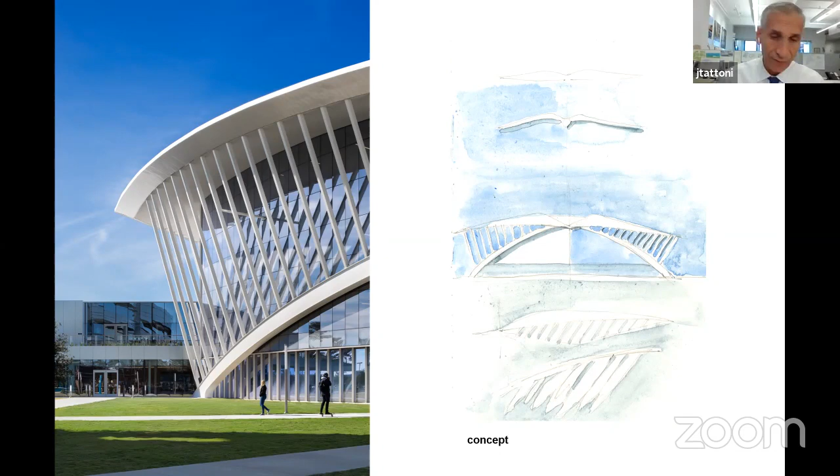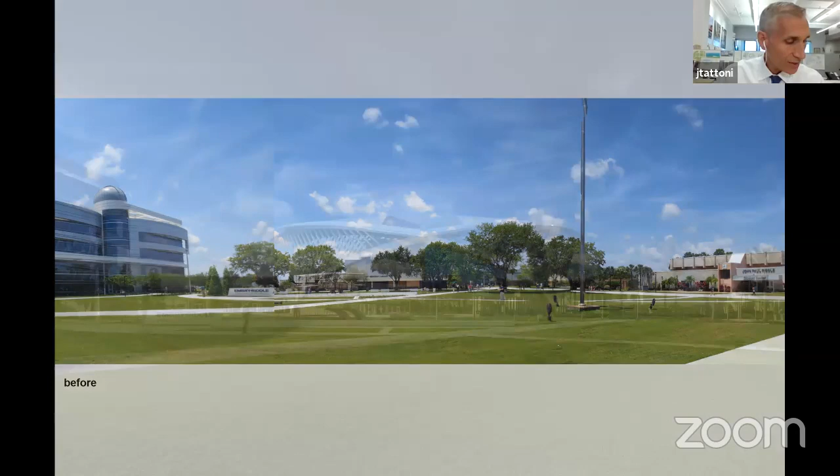This is a view of the site as one enters campus before the student union was built. We imagined that on this site, the overall resulting appearance of whatever we put here should somehow begin to belie gravity, to float and lift above the horizon. We realized the way to achieve that concept was through structural steel.

To give some further context to the project, the campus sits at the edge of the Daytona Beach International Airport. From this part of the site, one could see rocket launches from Cape Canaveral to the south. So it was an important site for the student union building.

One of the characteristics of campus life that we learned from students over and over again as we talked to them is how much they enjoyed gazing up at the sky to see the sky and the stars, walking around campus day and night. This gave them connection back to the discipline that they were studying.

So we decided to place in this project a 250-foot long glass roof down the middle of the building that would allow us to bring controlled daylight into the center of the student union and give students inside visual access to the sky that they love so much while socializing or studying.

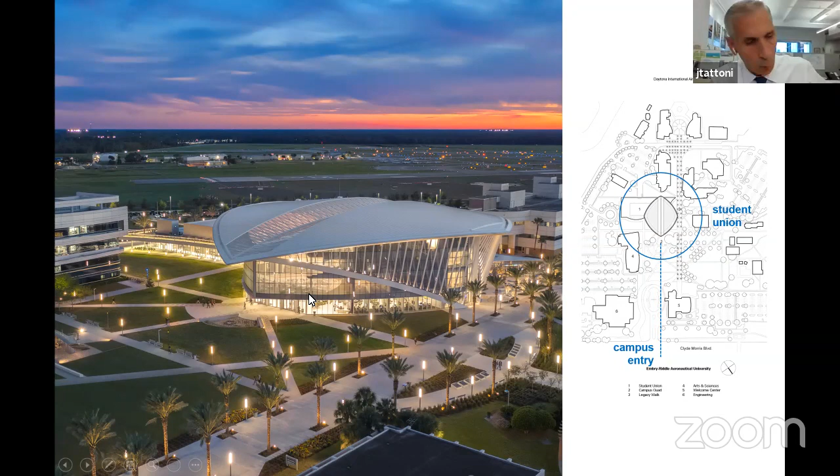It was at this point in the process that structural engineering, fabrication and erection, and conceptual ideas started to become real. How do we begin to make all this something real?

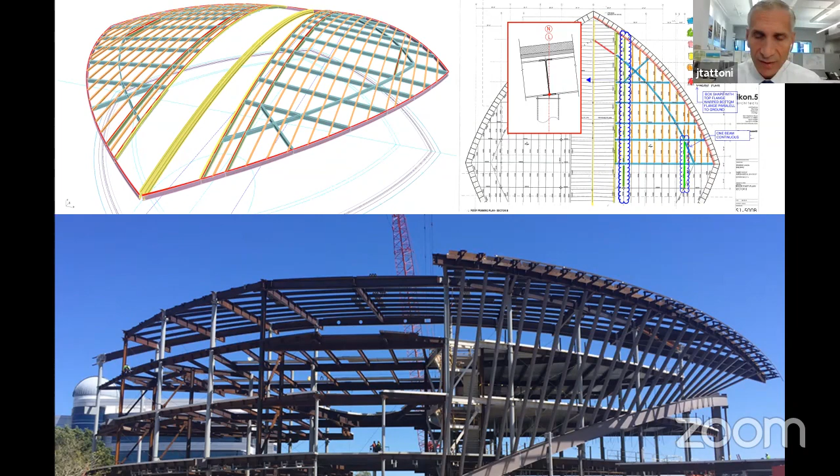The design team worked in multiple formats: AutoCAD, Rhino, Revit, Tekla, even hand-drawn sketches, to simultaneously refine and develop the concept of the student union.

Oftentimes, these ideas, like this one for the 250-foot arching spine beam that supported that glass roof, were initially conceived and developed between team members as hand drawings, just outlining quickly the design intent.

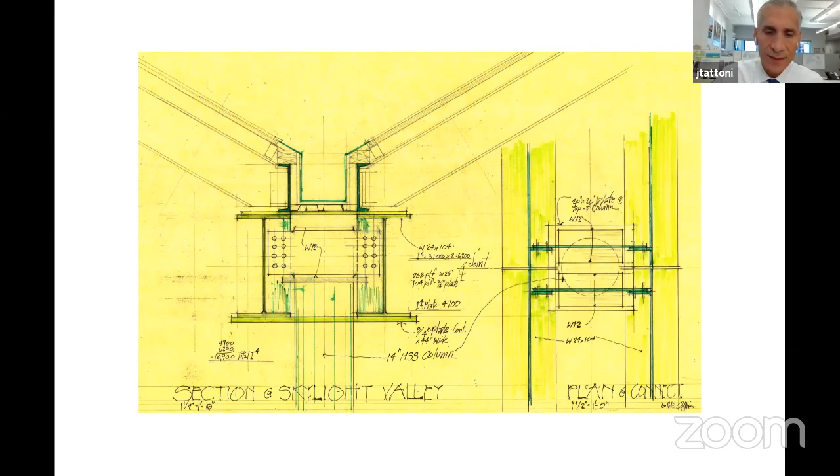Those sketches were then developed three-dimensionally during design, evaluating how all the component pieces would be put together in what ultimately ended up being a very complex structure, in this case the roof structure, and how they would seamlessly appear to be integrated, promoting the idea and delicacy of flight, the gracefulness of flight.

This was really a process of back and forth. While we imagined what we would like it to appear like, working with the structural engineer and thinking about the reality of the pieces often changed some of those expressions.

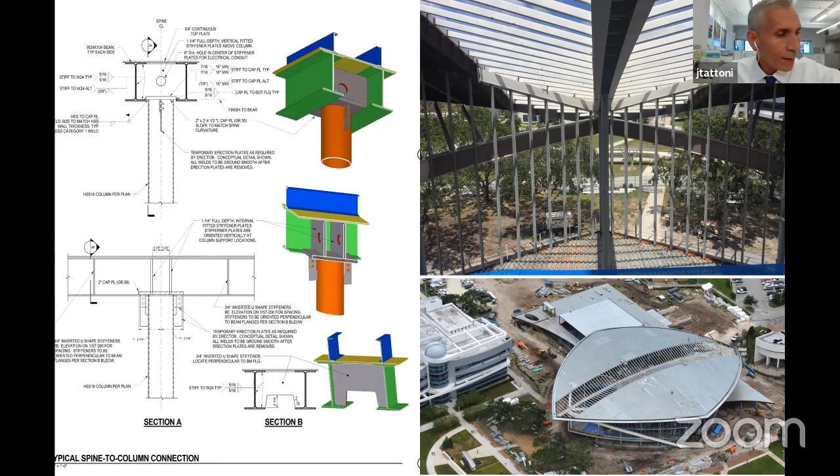So this meant no exposed plates, no exposed hangers, no exposed bolts. Every piece of exposed structural steel needed to tell the story of lightness and flight.

This is a view of inside the great lounge of the Student Union, looking out onto the campus green. It's a 4-story space that literally wraps and embraces you when you enter into the building. You could see the beginning of that glass roof with the arching spine beam down the middle.

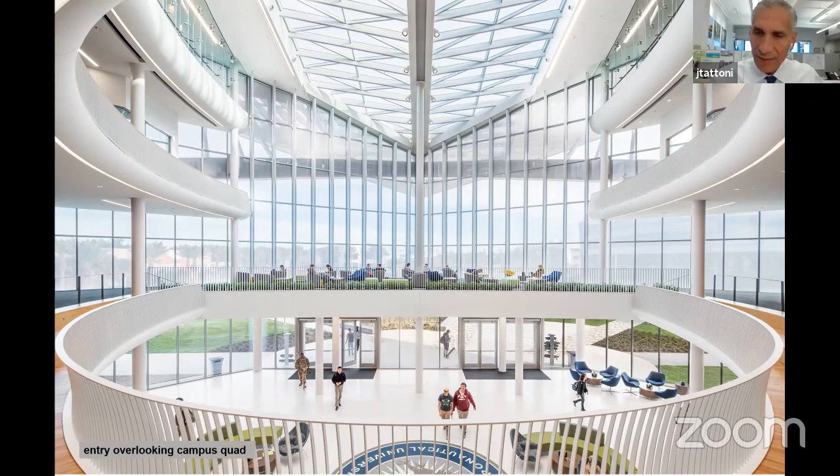It actually initiates outside above the entry plaza, continues into the great lounge, and then into the center of the building, where it allows the sky to be the ceiling of the university library on the 4th floor.

Structural steel tubes between that spine beam and the adjacent roof support that glass ceiling, or that glass roof.

Now, the exaggerated roof overhang gives the building its kind of lifting quality. It also provides deep shade for the building from the intense Floridian sun. The remainder of the building envelope, besides the roof, is actually glass.

So to stabilize that overhanging roof from wind uplift and hurricane force winds, we wrapped the exterior of the building with a sloping structural arch on the outside, and connected from that arch structural trusses that went up to restrain that overhang.

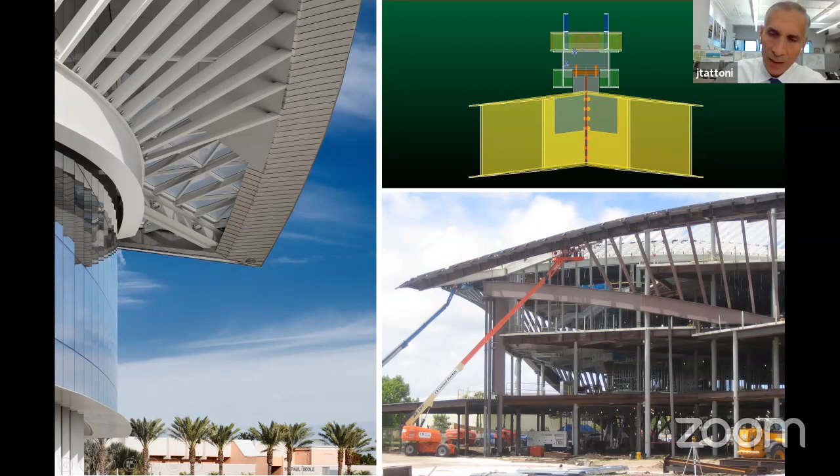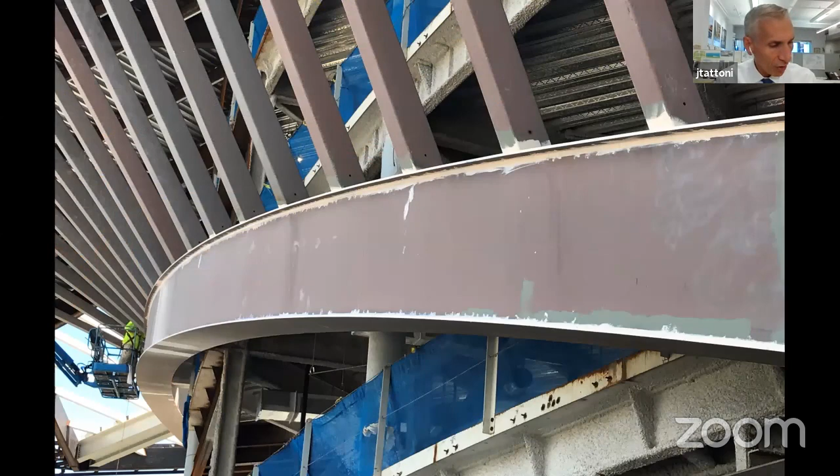Those curving shaping arches were fabricated in sections in Pennsylvania and then shipped to Florida for assembly on site. The assembly of that arch and the strut creates a fanning wing-like expression with structural steel.

So the result of all that coming together was we were able to restrain the roof, we were able to provide shade, and we were able to ultimately convey the mission of the university.

The result, as seen in this photograph, is really a very dramatic skeletal expression of movement created out of structural steel that allows and reveals all of the student activity that's going on inside the student union.

This is a view seen from a major pedestrian pathway on campus, coming across from the residential precinct to the student union in the center of campus.

Now, the student union happens to be bilaterally symmetrical, except for a 2-story, 900-person event center, which is on the east side of the building.

Now, that elaborate hovering roof that looks like it's magically hovering there really is not hovering there. It's supported by a forest of very serious columns that are taking all of the forces from above and from each of the floors and translating it down to the foundations.

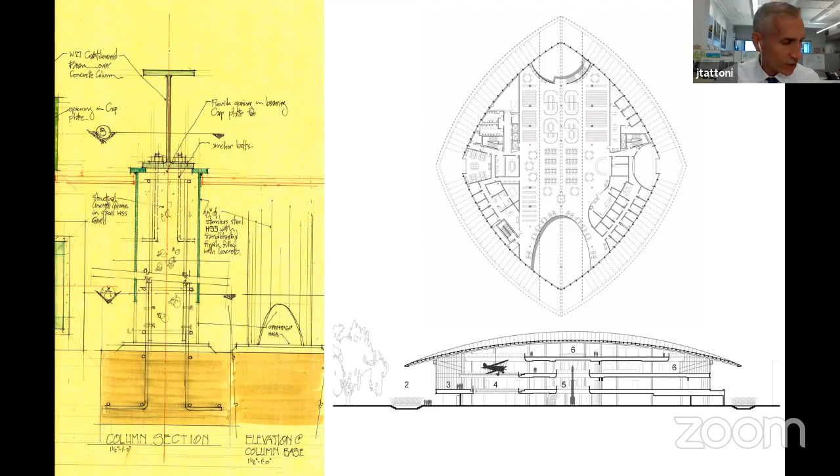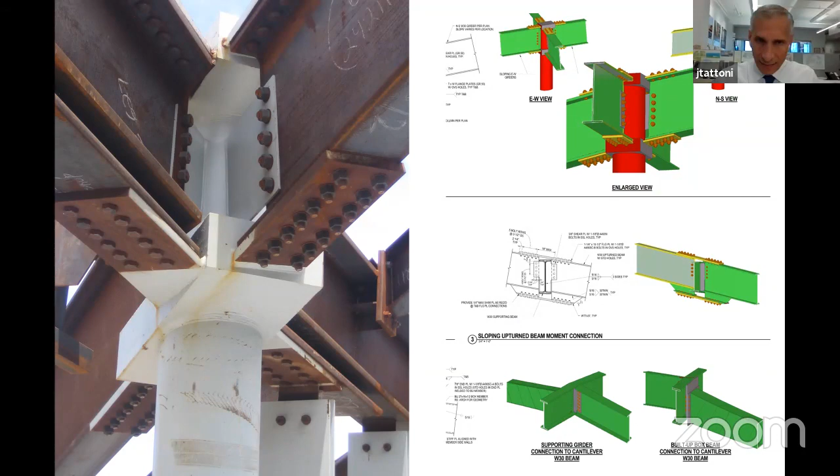All the warping, arching, sloping beams and plates that make those graceful forms on the outside of the building are concentrated into single points at each of the columns and posts. Yet those robust steel pipes needed to also appear very delicate and to disappear over the floating slabs of each floor, in order to convey that idea of lightness and flight.

This is a view of inside the student union, the great lounge space. You see in the foreground the horseshoe-shaped amphitheater seating that occurs on two of the floors above the first floor. So as students come into the student union, they're able to see their fellow students coming in and out, and they're able to be seen.

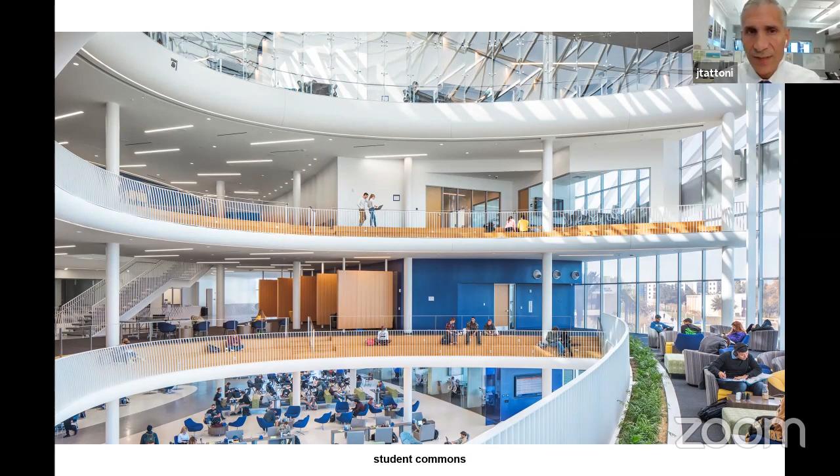This is an important factor in designing student unions. On each side of this great lounge space, there are a series of rooms that support it: group study spaces, career services, computer labs and classrooms, an e-gaming center, offices, student government offices, clubs and organization offices. Like the exterior, the interior forms and shapes convey an idea of aerodynamic movement also, while at the same time framing views of the beautiful campus beyond and providing a variety of seating types for both group work and collaboration, as well as individual scholarship.

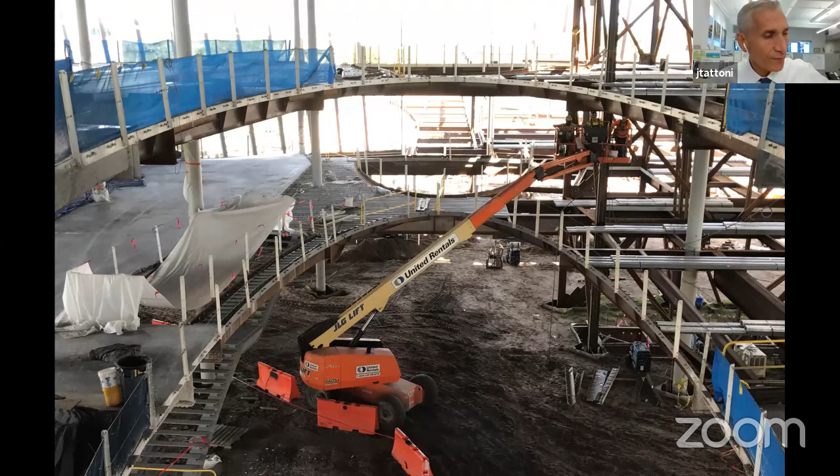The interior curving forms and surfaces are also supported by curving structural steel. This is a view of the student commons in the center of the building, and this is that same view, complete. The oval opening connects all three floors together. Architectural lighting is used to reinforce that aerodynamic movement in the space.

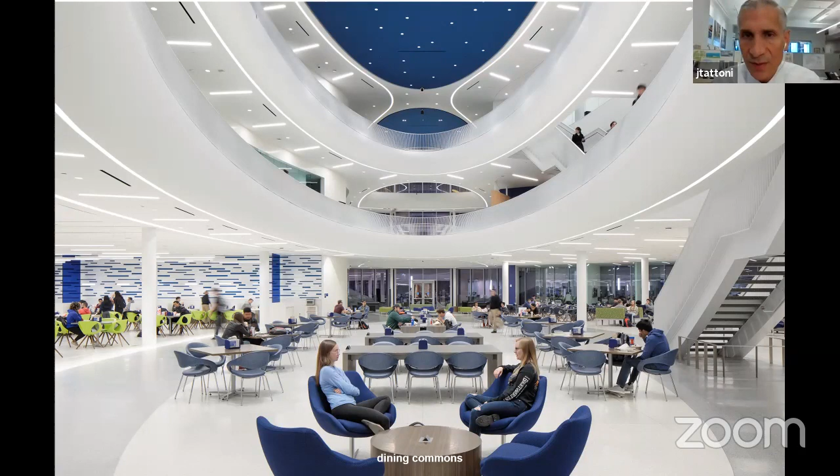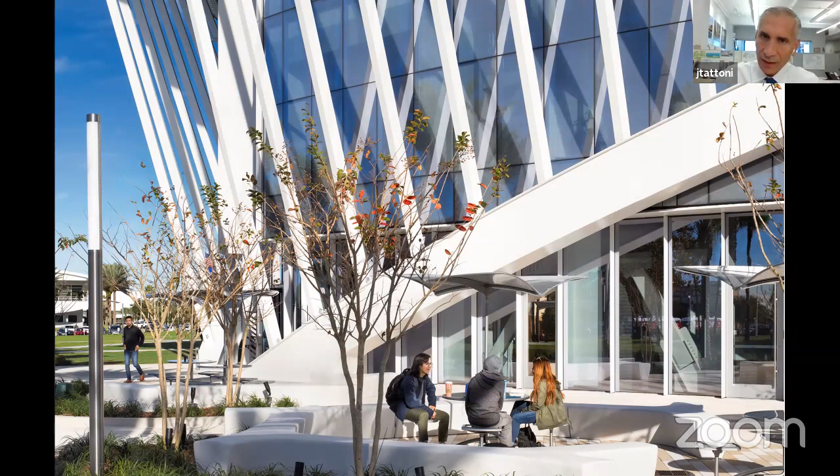Similarly, on the exterior of the building, those low arching, sloping arches that are supporting those struts create implied exterior rooms where there's outside seating for dining, outside dining.

I guess in the end, I can say that it was really the characteristics of structural steel to be able to twist and to bend and to arc and to warp, while at the same time transferring significant gravity and lateral forces, which allowed us to take the abstract idea of the concept of flight and lightness and make a very real physical structure that ultimately reflects the mission of this great university.